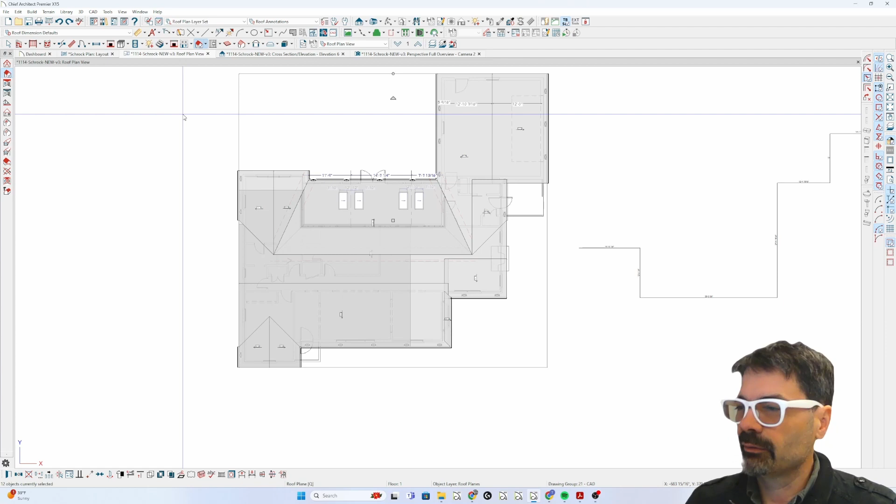I am in roof plan view, and my hotkey for roofs is the letter Q on my keyboard. So I'll hit that, then shift-drag select all of the roofs here. You can open these roofs by using Control E on a PC or Command E on a Mac. I have this tied to a button on my Logitech mouse to open these, and I'm going to go to Shadow Boards and Add New.

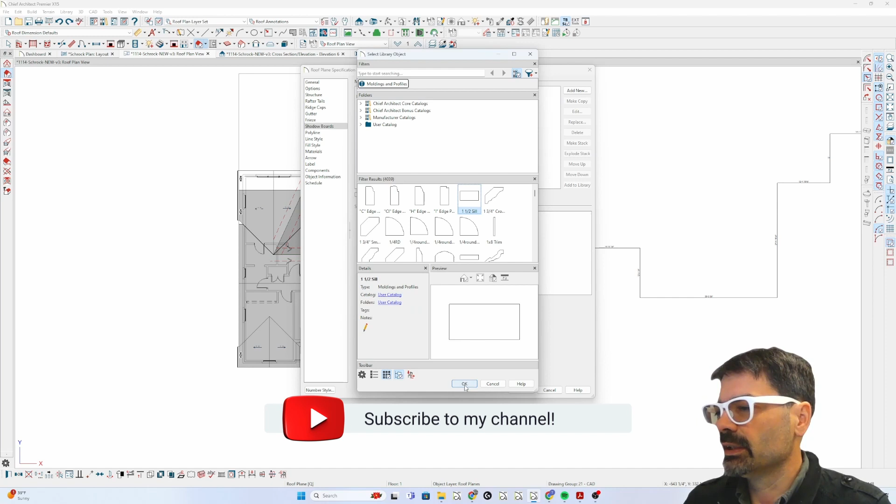It doesn't matter what profile you choose, as long as it's a rectangular profile. It could be this 1.5 inch sill, 1x8 trim, or this 3x10 — we're going to resize it anyway. So I'm going to use the 1.5 inch sill, and change this to maybe 1/8 of an inch wide and 2 inches tall.

Let's say, no, that drip edge is probably only 1.5 inches tall, right? Then going to materials, there's my 1.5 inch sill — that's what I know to be the drip edge. That's the molding profile we chose.

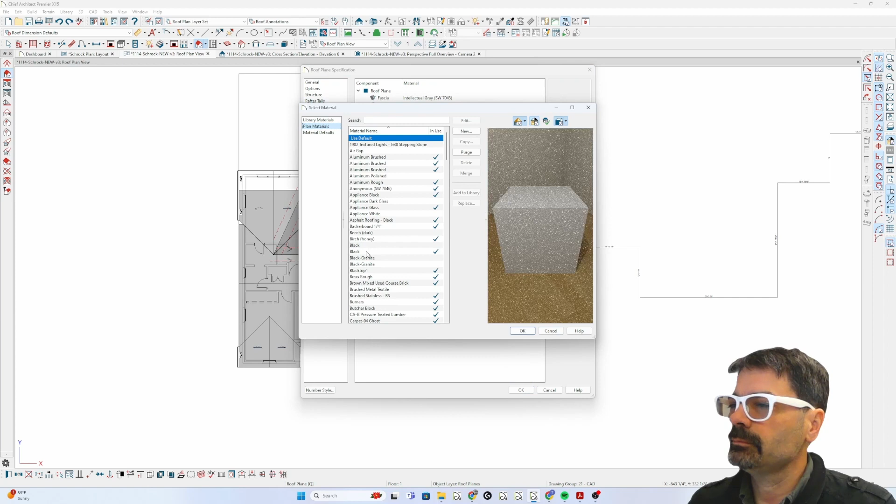So currently the default fascia is Intellectual Gray. I'm going to select a material, go into plan, and choose black. If you went into library materials, you could choose color black right there, however you like. I'm just going to choose black here, click OK, and go into our camera overview.

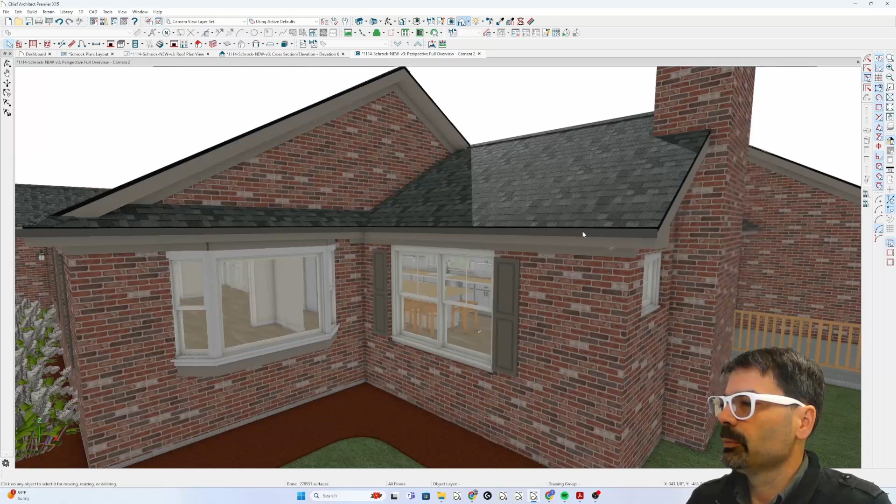Now you see the drip edge, and just above the gutters you see the gutter apron. If you didn't want to show the gutter apron, go into plan view and select all of these again, then go into Shadow Boards.

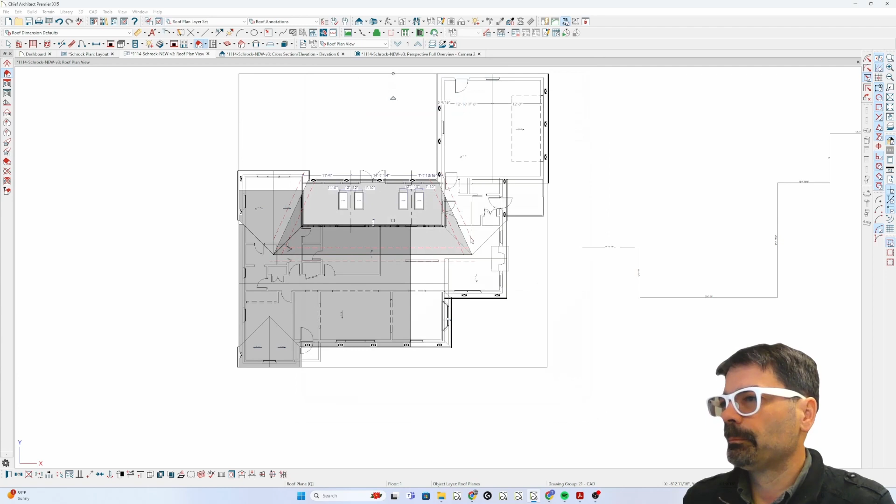By default, it added this profile, 1/8 inch wide and 1.5 inch tall, to the eaves and gables. Let's say we applied it to the gables only — you can see that fascia coming up through behind the gutters.

So the gutter apron really is there, so maybe I'll undo and show the gutter apron as well. And there is my drip edge and my gutter apron as a separate color from my rakes and eaves.